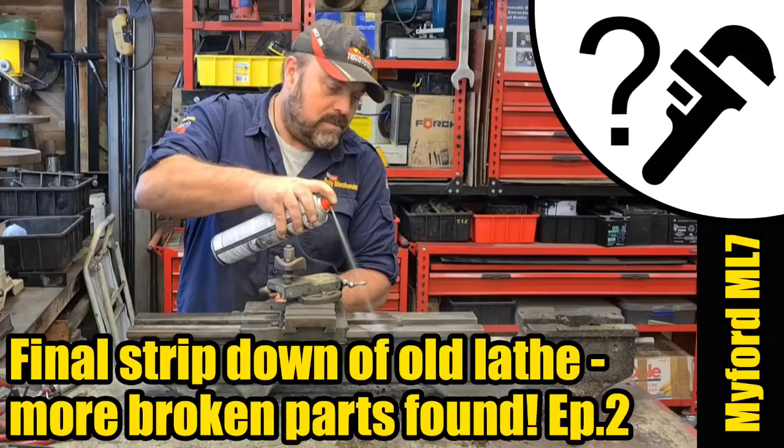Now, this particular lathe was made back in 1954 or 1955 by Myford. I'm not entirely sure of the day it came out of the factory. In the last video, we had a major problem.

That problem being, we weren't able to remove this end gear from the spindle. That's what Myford call this - this is the spindle from the headstock. If you look very closely, the two holes, or half holes, semicircular holes, should be aligned with a grub screw in there to retain this gear on the shaft.

I'm very confident that grub screw has fallen out at some point, and the gear has spun on the shaft, heated up, and welded itself to the shaft. But there's more to it than that - there's another reason why what I was doing in the last video was completely futile when trying to remove this gear the way I did it.

Let's take a quick look at the parts diagram and I'll try and highlight what the problem was - the oversight on my part. Here we go.

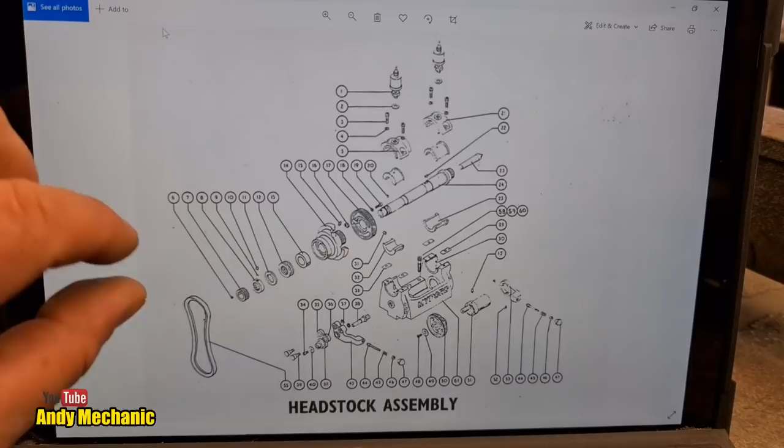So, as per the Myford service manual for this particular lathe, the ML7, this is the headstock assembly, and all the parts are numbered for reference so you can get the part numbers from the next page. The gear in question that we can't remove is this one here, and that little black dot, number 6, is the grub screw that's supposed to retain it on the shaft.

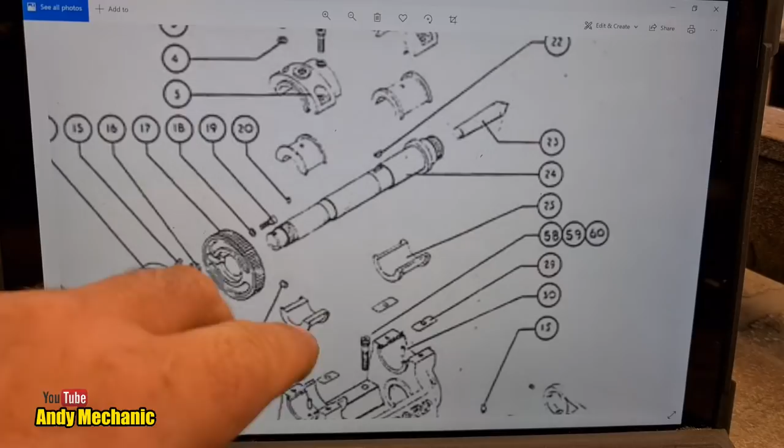If we follow that across on the exploded diagram, we can now see the spindle itself. If you look very closely, just there, I now know that to be a thread - very hard to tell from this diagram, but it is threaded. If you look at the other end of the shaft where the chuck goes on, it looks similar in the way it's greyed, but it's a very poor resolution image. I'm sure the actual printed manual will be a bit clearer.

That thread is for this collar. Number 8 is threaded onto the shaft, and it has its own little grub screw to hold it on. I was unaware that thread existed, and had the puller on the back of washer 11, trying to pull all three components off at once.

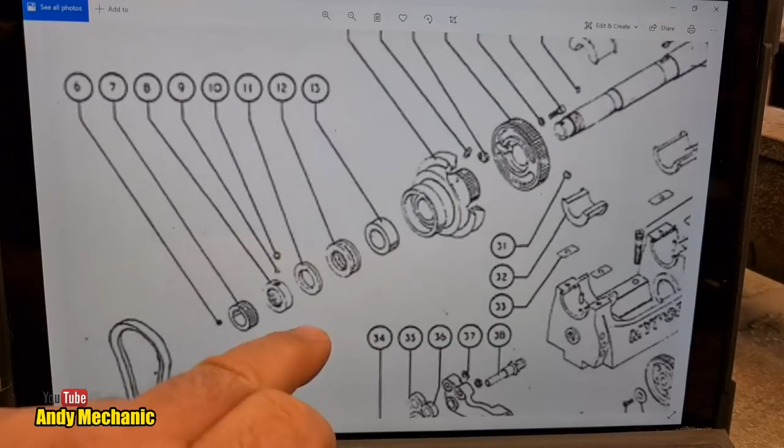The reason I did that is it was a lot easier to get onto that collar there - look, big washer with the puller, or even in the press - than it was to try and squeeze some kind of puller arms onto the back of the actual gear itself, which just, there was no space. You'll see that a bit later on. So we still have a problem.

So what are we going to do? How are we going to get that gear off? This collar here does rotate slightly - obviously it's free and now turning on the threads. If you look very carefully, you might see the gap between this collar and the washer underneath increase and decrease as I rotate that. It's very hard to see.

There is only a tiny gap between the collar itself and this gear. So we might be able to get in there with some big screwdrivers and give it a bit of a yank and see if that's going to cause this gear to come off.

The reason why the press in the previous video and the puller were completely futile is because I was trying to pull up on this, and of course the collar above it is threaded, so it was pulling against the threads basically - if I continued it could have let go and the whole lot gone flying around the workshop. Could have caused injury. So it just goes to show you need to do some research before you pull these things apart, and I made a mistake.

Hand up, Andy Mechanic did - another mistake, unfortunately. So we'll get this mounted in the vise and see if we can prise that gear off. We might even be able to use a little bit of heat.

Okely dokely. So like I said before, I was trying to lift it or pull it off from under here. We now know that was never ever going to work.

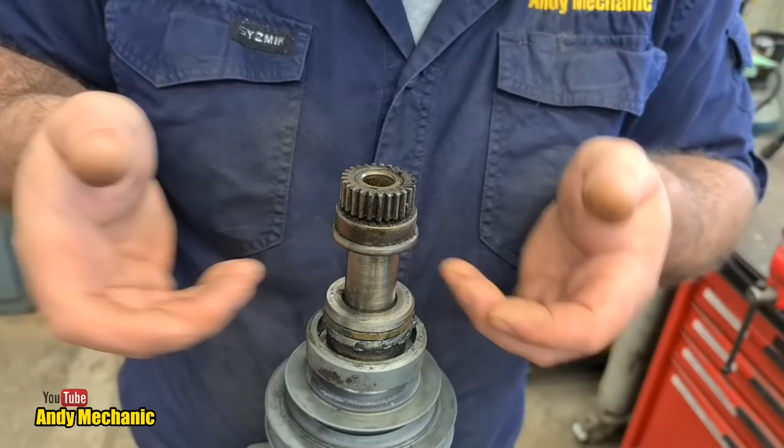Now you shouldn't use screwdrivers in this way, but the gap is so small, it's really only a screwdriver blade that I can get in there. So by using two opposite, I can sort of lever against this collar underneath, the threaded collar. I don't know if it's going to move or not, but we'll give it a go.

Look at that, it is coming off. Holy moly. I can probably get a puller underneath there now, because I'm running out of room with the screwdrivers, my leverage is disappearing. Oh, there we go, look, it's off. That actually wasn't too bad.

Excellent. See, with a little knowledge, things can be a lot easier, can't they? We'll get that out of the way, and now we should be able to take this off. I'll get some pliers and get some big vice grips on there or something.

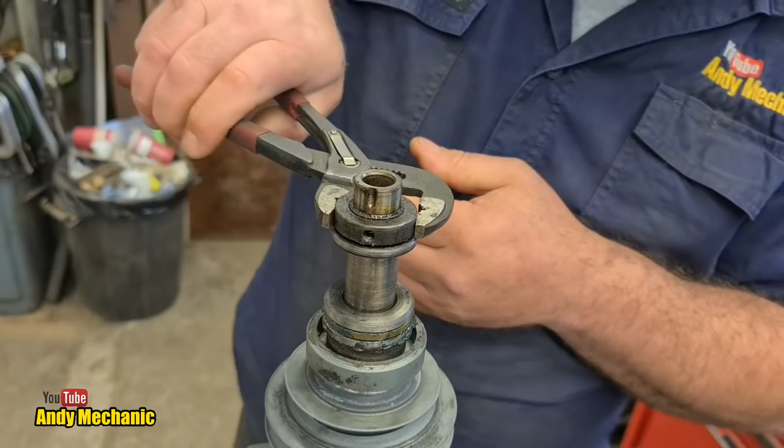Right, poly grips to the rescue. It's a little bit stiff on the threads, not surprising given the abuse I was giving it before. There we go, look. Wow.

And the gear itself, from the readings that I've done, this actually is a press fit gear onto the shaft. It doesn't just spin freely and held on just by that lonely grub screw. Well, that's fantastic, very happy that that's off now. You can see the threads that hold that collar in place.

Right, just lining everything up on the bench. Now we should be able to get that washer off. All goes to plan, there we go. And there's a little tiny pin.

I'll just rotate it in the vise for you. Jeez! There's a little tiny pin that also locates that washer into place, and that's just there, look. So we'll see if we can try and get that out next. It might be harder than we think. We'll see.

We've got some movement. I think it's coming. Yes, definitely coming out. Oh, there we go. Right, don't lose that.

So now we should be able to remove this thrust bearing, so we can get that bit off. And that's one of the outer races and the bearing itself. Pop that down on the bench. And we've still got this inner race to do.

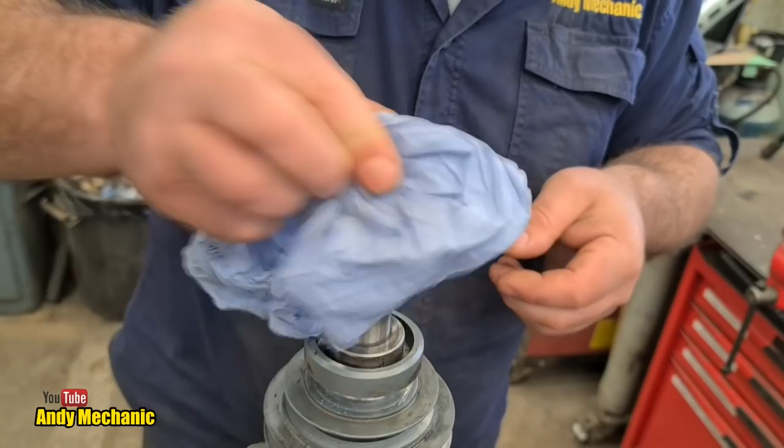Right, what's next? Okay, looking in the parts diagram, it appears that we've got the aluminium pulley set, and we've got what looks like a steel collar, another one. But this time there appears to be no grub screw, so all I can assume is that's a press fit onto the shaft. And yes, this is all part of the pulley by the looks of it.

And that is the steel collar. Now, I'm pretty reluctant to put a puller under here, but I can't see any other way of getting this collar off. So we're going to have to pull the pulleys with a puller off the spindle, and hopefully it'll bring that with it. Let's make sure we get right under there, aren't we?

Otherwise this aluminium could break off and then we've destroyed the pulleys. And they don't look to be in too bad a condition at the moment, although I've not done a full inspection yet. Jeez. Now, the pulleys themselves also have a couple of grub screws in them.

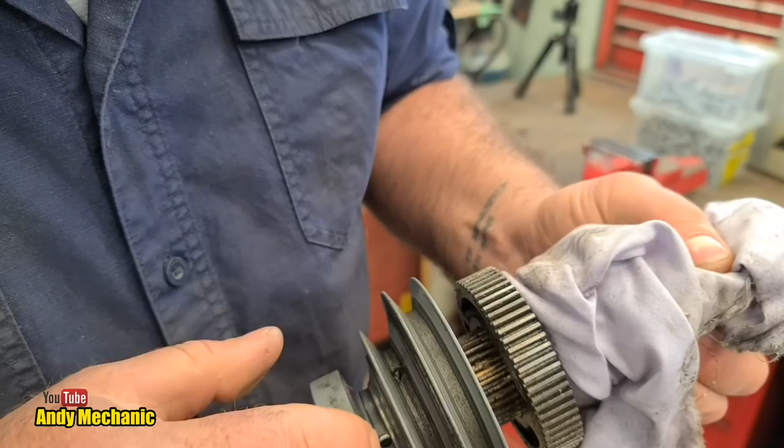So I need to remove those first. You can see down there, look, one's already missing and there's one in there. So we'll get that one pulled out. Like I said before, one of the grub screws is already missing from this pulley set, but we can get this one taken out now. Right, where's my little pliers? There we go, right, let's not lose that.

Now, I've been able to think about how to do this. I'm really reluctant to put a puller on the back here to get this collar off. I'd rather try and get something on this shoulder here and push the whole lot off in one go. I think we've got far more chance of not breaking something by doing that.

If I distort this piece, we've got a serious problem. And don't forget, it appears that there's a belt. This is actually a pulley itself here, and this surface here is a belt driving surface. So if we cause any harm to that and put marks in it, it's going to start to eat belts. So I think it's a complete no-no to put a puller on there.

We only have one option. Now, to do that, we need to make sure there's no more grub screws on any of these components. By the looks of it, there's one more here, so we'll pop that out if we can. So far they've all been pretty loose. Now these are Imperial. Oh, there we go, that was easy enough.

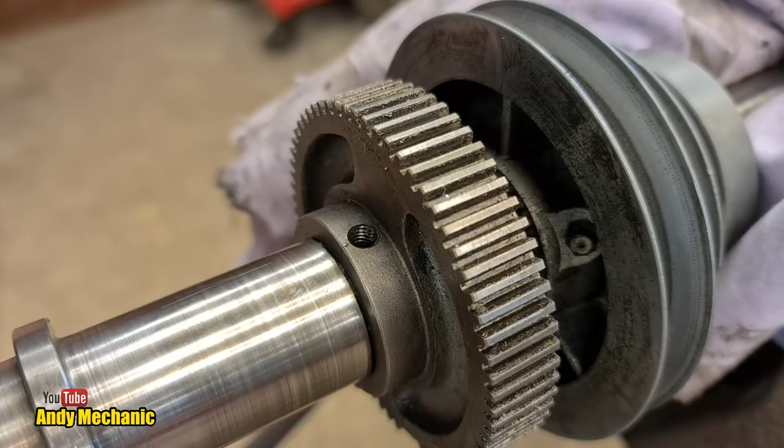This gear is the reason why we're stripping this whole thing down, mainly because it's got some missing teeth. Where's my pliers? There we go. I think they call this the bull gear, from memory. Okay, so that's out. That gear's still tight on the shaft.

Are there any more? Let's have a quick spin round. Jeez. Okay, I'm going to undo that because there's a little locking piece at the back, and again, I don't want to put any stress on that while I'm pressing the whole thing off.

So, is that the same size? It's not. It's the next size up, which is 5/32. Sorry, I'm a metric kind of a guy.

There we go, look. Make sure you're all the way in. Here we are. Excellent.

Right, so now the little piece at the back should come out. It's like a little locking piece. There we go. Hey, come back. Excellent. Right, that is now out, and we can remove that.

So we'll just screw that back in there so we know that's where it comes from. Cool it up, stick that on the rag. Okay, so by the looks of it, all of this now is free on the shaft. We've got the pulleys spinning freely, and that inner gear down there appears to go with the pulleys for now. So we'll get it back in the press and go against this shoulder here.

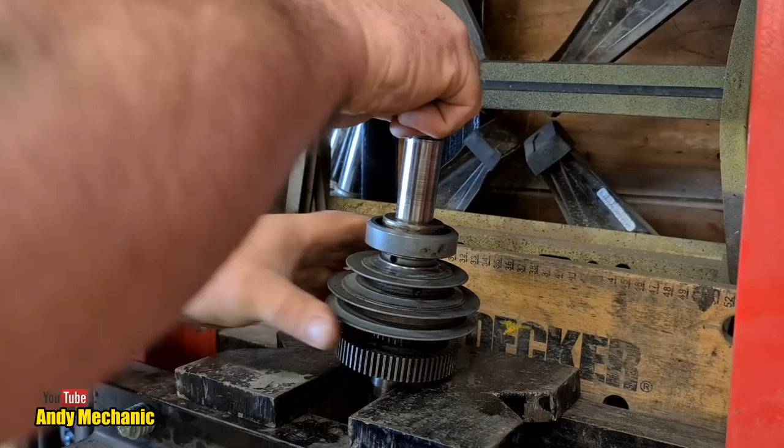And see if we can get the whole lot pressed off in one go. Fingers crossed. Jeez, is it going to work? I don't know. Should do. I can't see any reason why not.

There we go. Here we go. There's some damage on those threads. Jeez. Oh, look at that. Right, we've got instant movement. It's not too bad. Everything seems to be moving really well.

Just going to ease that through and catch the spindle as it ejects out the bottom of the press. That actually was remarkably easy. I was expecting a bit more of a fight, to be honest. Oh, there we go. Perfect. Super job. Right, back to the bench.

Right, actually with a little bit of research, we're able to get that spindle stripped down really easily. It could have all gone really badly wrong if I'd just tried to continue the way that I was in the first episode.

However, the spindle itself needs to be replaced. It's got quite bad scoring where the two bearings run. That's this area here, just behind the chuck, and of course this area here. If you run your thumbnail across there, you can feel ridges in the shaft on both sections.

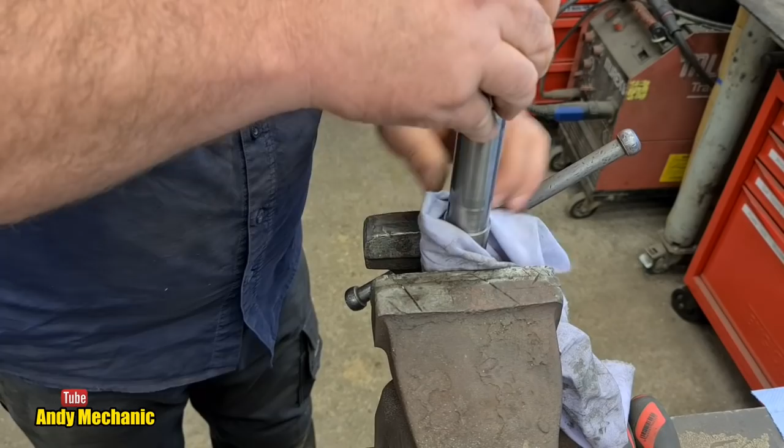So, how are we going to do this? We'll pop that in the vise from that end, using a rag. Again, they are aluminium jaws in this vise, so it's just an extra precaution. In fact, it's going to have to go upwards, isn't it? It is. So we'll stick that down there like that. Right, if we get the pulley set, and it runs in this area here on the shaft, just behind where that woodruff key is.

Drop it down there, onto the shaft. And I'm just going to hold it in about the right position and just feel for any kind of... I'm trying to rock the pulley side to side to feel any kind of play on that bush. And there is the smallest amount, a tiny amount, really just enough for oil clearance, really. So I think that's in pretty good nick.

And the bush itself does not look badly scored. It looks pretty smooth on the inside. So I think we've dodged a bullet with that, and we're all good. We can reuse these. So with the spindle now fully stripped and all the parts sort of inspected, the bits that I needed to inspect at least, the other bits are going to get replaced anyway.

What's next? Well, we should really strip down the gear train that sits at the back of the lathe, at the end of the lathe, behind the headstock. It's filthy. The lathe has been sat exposed in the workshop for a fair few months, and there's lots of grinding dust and dirt and all sorts that's got into those gears, and they all need removing, cleaning, and then inspecting. So you can join me and we'll get them all taken off, hopefully.

It sounds like we've got our wannabe lumberjack running his chainsaw again.

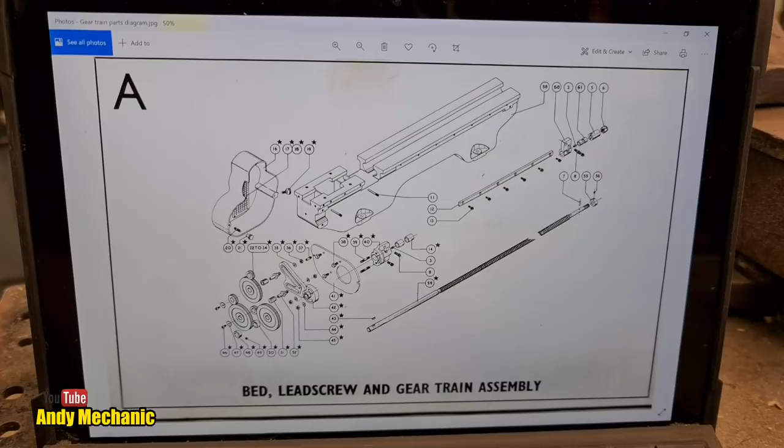Excellent. Okay, so this is the bed, lead screw and gear train assembly parts diagram. How was that for a mouthful? So just looking for a few clues before we start to delve onto the lathe itself. Doesn't look too difficult a job. We've got some end screws here with washers basically holding each of the gears onto their respective shafts. And the idea is, oh, go away. The idea is to get all of this removed together with the bracket that sits at the back. Yeah, shouldn't be too hard, should it?

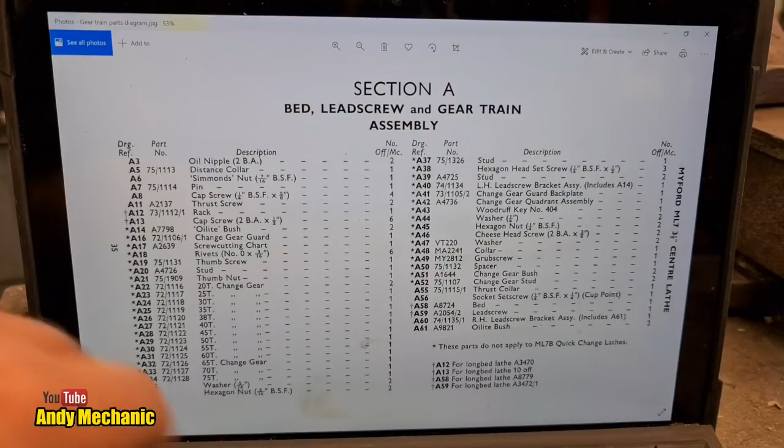We've got all the various part numbers, just for your reference, all the part numbers relating to the numbers on the diagram, just there, look. So we go back to the full diagram, you can see everything there. Right, to the lathe. As you can see, it's very, very dirty. There's swarf and bits of wire brush and all sorts embedded in this. Now,

I reckon this one first, don't you? Let's give that a go. See, I wonder how tight it is. Oh, there we go. Not bad. Not bad at all. And I've got a good parts bin ready to accept everything that comes off. So we've got a screw and washer, and then we should be able to get that gear off there, look. There we go. Any teeth missing? Oh, it looks okay for now.

I'm hoping I don't find any more damaged parts, because that would mean more delays in getting the bits from the UK. That looks okay on initial inspection. So I'll pop it over there with all the grease. Now we can do this one now. Let's get this one undone.

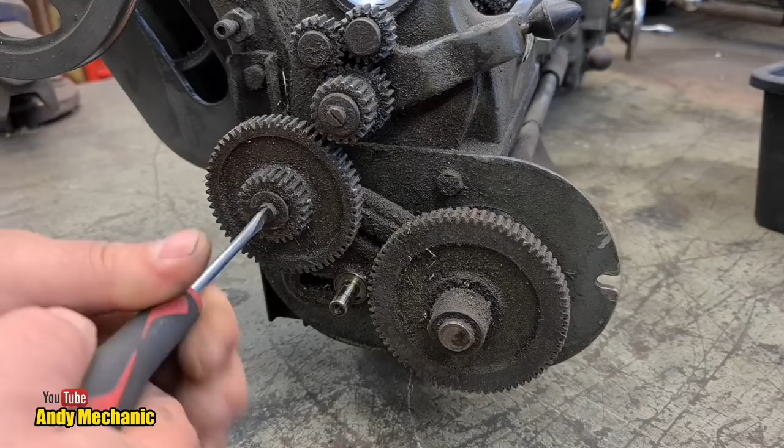Jeez, he's cutting some logs today.

Right, there we go. And these are not over tight, to be fair. And by the looks of it, there's no thread lock on them. It's just oil or grease on the threads. That's something else to note during the assembly. Both of those two screws look to be the same, but the parts diagram will confirm that for us.

Right, so now we can get that one off. And again, any missing teeth. This is the critical thing. If we've got broken teeth, we have a major problem. Nope, that all looks okay. Look at the dirt on there. It's horrendous, isn't it? Right, we'll stick that over there.

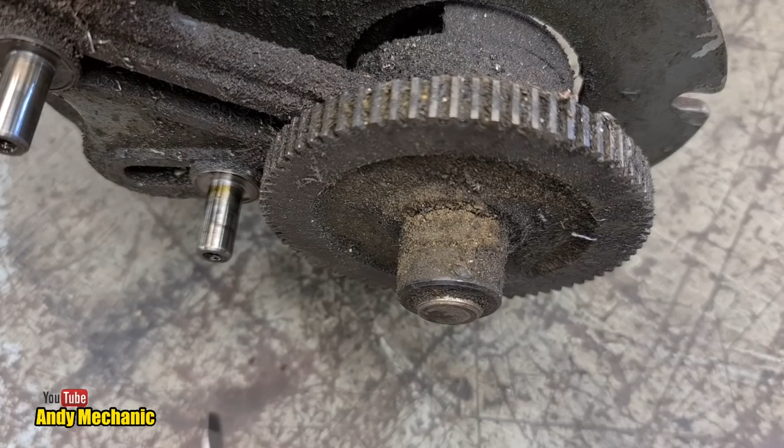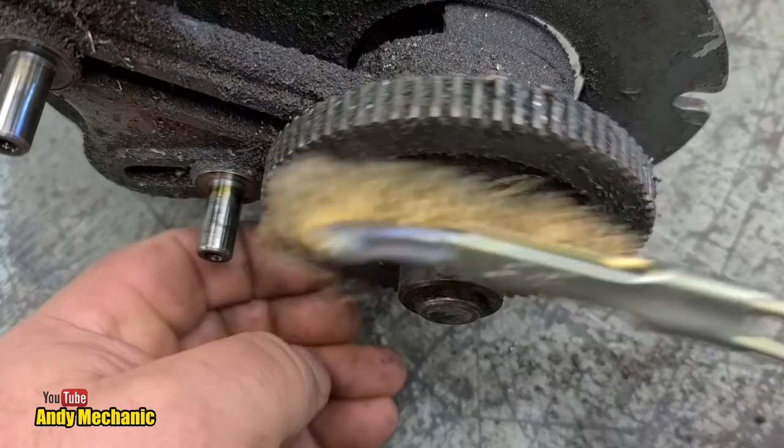Now we've got this one to get off, and this appears to be held on slightly differently. I wonder if there's a little grub screw hiding under there. Time for a wire brush. Bit of a clean. Right, let's just get the thick off first, and then we'll give it a bit of a spray with some brake cleaner. Yes, there's a collar, by the looks of it, with a grub screw in it. There we go.

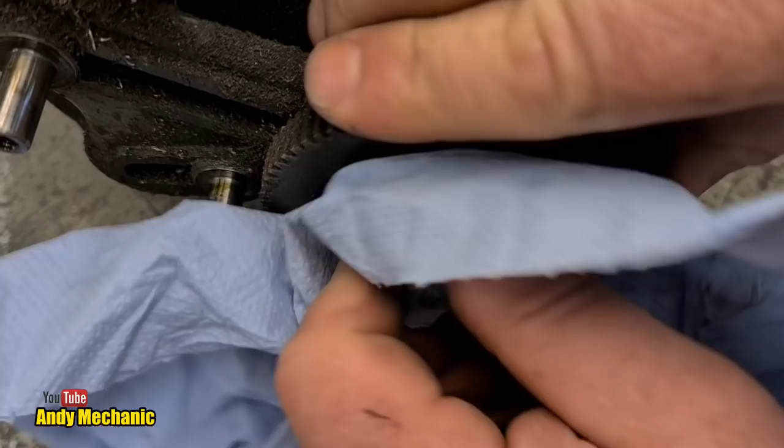Jeez, don't get on the lens, Andy, like last time. God, that would be terrible. In fact, it was carburetor cleaner last time, and I really thought I was going to destroy the lens on the camera. Or at least the surface of the lens, anyway. Okay.

Right, here goes. Looks a little bit chewed up. Fingers crossed.

Oh, yes, look at that. Bloody good. Right. I'm not going to take the grub screw all the way. Am I? Yes, I will. I'll put it back in again a bit later on, just so we don't lose it. There's a lot of grub screws on this lathe.

So, how are we going to get that off? Is it loose? It's not loose. Maybe a little tap. Is that one piece, or is that a spacer behind it? I don't know. I wonder if I can wiggle it off with a flat screwdriver. Oh, look at that. That was lucky.

Go on, mate, you can chop that log.

Is that one going to move? Yes. Okay, can we lever them both off the gear? Almost. Two screwdrivers required. Bear with me. It doesn't really warrant getting a puller out, to be honest. It's only just beyond being able to pull off with your fingers, so maybe we can just do that. Oh, there we go, look. It really isn't putting a lot of force on the gear itself. Right.

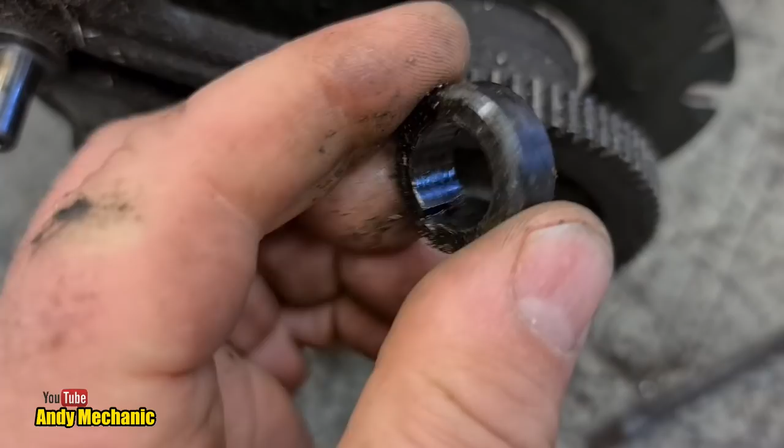Cool. And, little hint, there's going to be a woodruff key in there as well, look. So pop that in there. Twizzle that round, and hey presto, there's the woodruff key. So let's get the gear off first, if we can. He says. Oh, there we are. It's just a good fit. It's going slowly.

There we go. Right. And of course, it's in a filthy condition with the rest of it. But any missing teeth? Doesn't look like it, does it? I think we're going to be okay with that one. Yep, that looks all right to me.

Now, Mr. Woodruff key, is he going to pop out? Or is he not going to pop out? Sometimes they're a bit loose, sometimes they're really tight. This one looks a bit more tight. Maybe we can just ease him off there, look. Oh, there is movement. No, my word, that bearing's a bit shot, look. Look at that. Oh no. There he is. Right, woodruff key is out. Excellent. We'll stick that in the middle of the gear.

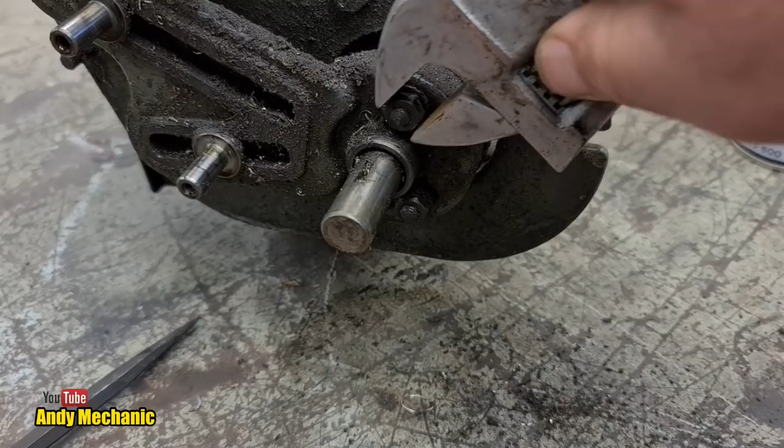I've got a choice. I could use a single hex socket, but you won't be able to see a lot of what's going on. Or I can use my Imperial monkey wrench. I don't know if this is going to work or not, but anyway. I do have some Imperial spanners, but they're in an old ammo box that came from England, which is buried in the other shed at the moment. So, I can't get it out. Let's give it a go. Oh, it was pretty loose actually. That was lucky. I'll have to get a set of spanners when I come to put this thing back together actually.

Right, can we get that one off? Yes. Actually, quite loose in fact. There we go. That was fortunate. And it seems that a lot of stuff on this lathe is actually quite loose. Right. Come on, Mr. Washer. There we go, that's one. Put him over by the parts tray.

Oh, that's a bit tight on the threads. Jeez, can we get in there? There we go. And the washer. I should have worn gloves. I know I should have worn gloves, but I'm trying to save my gloves because there's not many in the world at the moment. Right, that is now undone, and I think that should now come off there with a bit of persuasion.

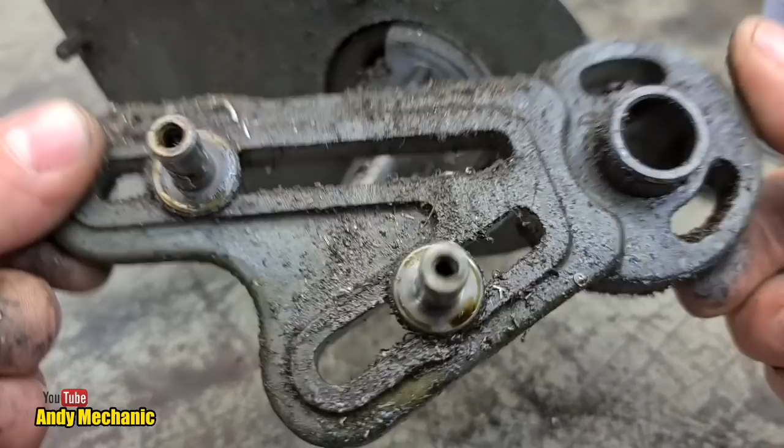He says, where's my big screwdriver? Everything's a screwdriver, isn't it, on these things? Oh, we're getting some movement. There we go. Super job. Look at the state of that. That is a bloody good clean, isn't it?

Well, whilst we're on with it, next job, this backing plate. And I've got a 12mm single hex socket on here. So, oh God, it's loose. Oh no. Right, that's one. I didn't want to use an impact wrench because there is some movement between the socket and the bolts. I can just ease them off with this rather than destroy the bolt head. I'm trying to keep everything as original as possible.

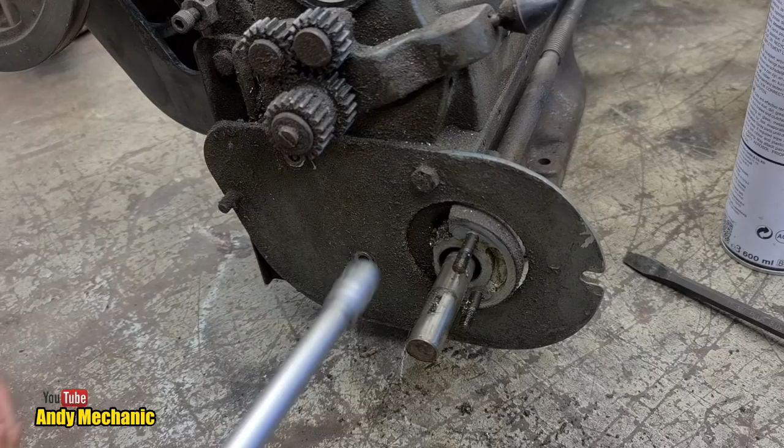Surprising how loose everything is there. There we go. Right. Oh my God, look at the state of that. You could measure that in inches, the amount of grime on there.

Next job is these sort of intermediate gears, and this I believe is for forward and reverse. I'm not too sure. I've never used one of these little Myford lathes. I think when you move this down, then there we go. Look, it then, I don't know, potentially puts another gear into mesh or something. I think from memory, from what I've read. We'll soon find out when we get this thing fired up though, won't we?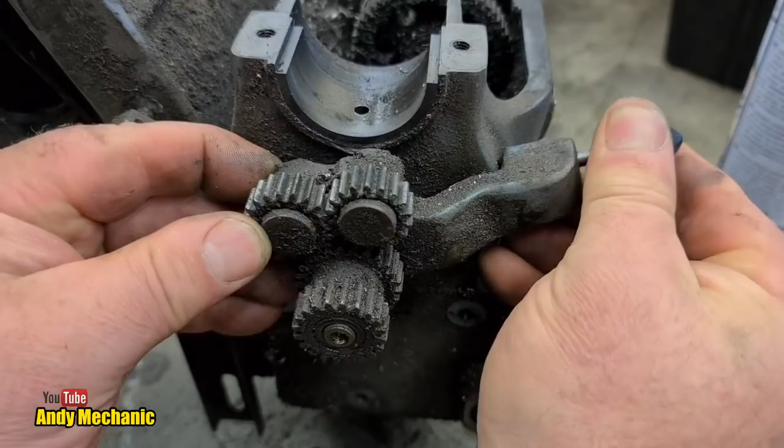Right, another screw. Another loose screw. There we go. Okay, now, will that all come off there? I think it might if you pull that plunger out. It's going to need some persuasion. Where's my big screwdriver? Is that going to help? I don't know. There might be a grub screw in there. Let's go and check the parts diagram.

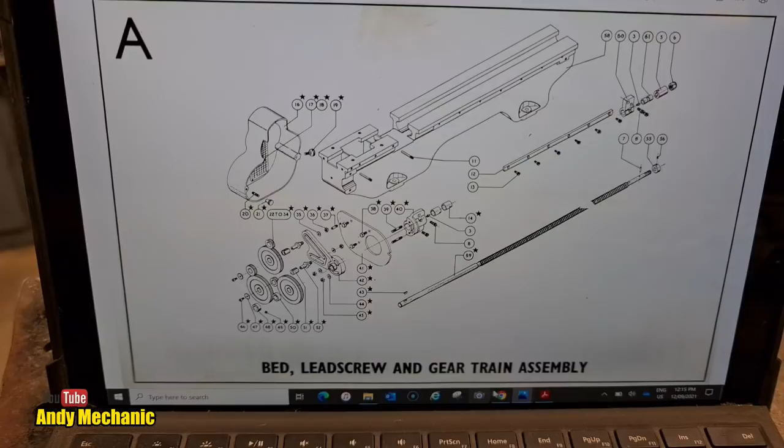Right, let's have another look. Ah, it's not on this diagram, so we're going to need to download a different one from the Myford website. So let's go on to there. I've already got it up on Google. There we go. So if we go back one, here. So where will that be? We've done headstock assembly. We've done bed, lead screw and gear train assembly. What section will those gears be in, do you think? Quick change gearbox, we haven't got one of those. Motorizing assembly, maybe in there, I'll have a look.

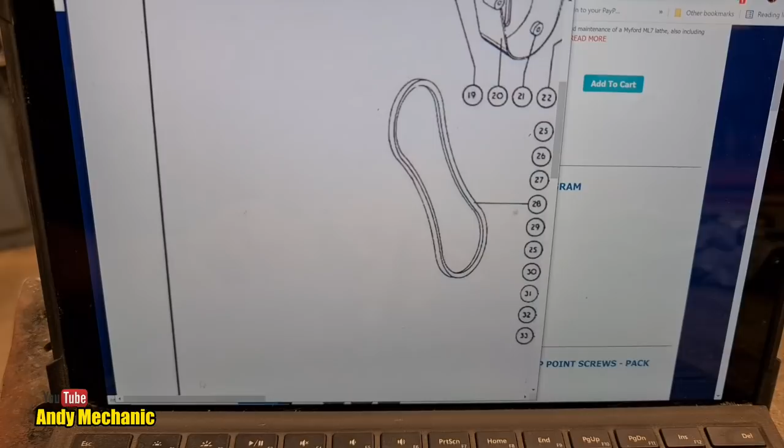Right, view parts diagram. Let's see if it's in that. Hang on, it's going to require more fingers because I've not downloaded it yet. Is it in there? It's not. That's just the motor itself by the looks of it, I think. Oh, there's some more at the bottom. That's just the parts list. So no, it's not in that one. So we'll close that. We'll go back.

What could it be in? History of the ML7. Interesting. We should do that one day. Carriage. No. Headstock. Maybe it's back in the headstock again. Let's have a look. I don't think it is, but we'll have a look. I'm pretty sure this was only... Oh no, there it is, look. Okay. Right, so zooming in. It's a pretty pants picture, isn't it?

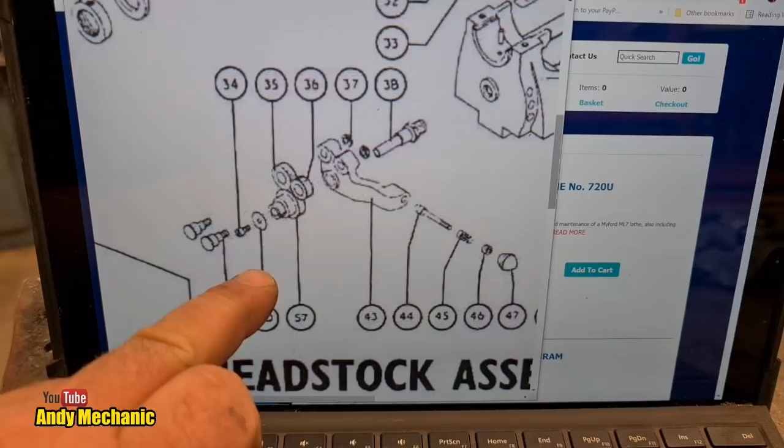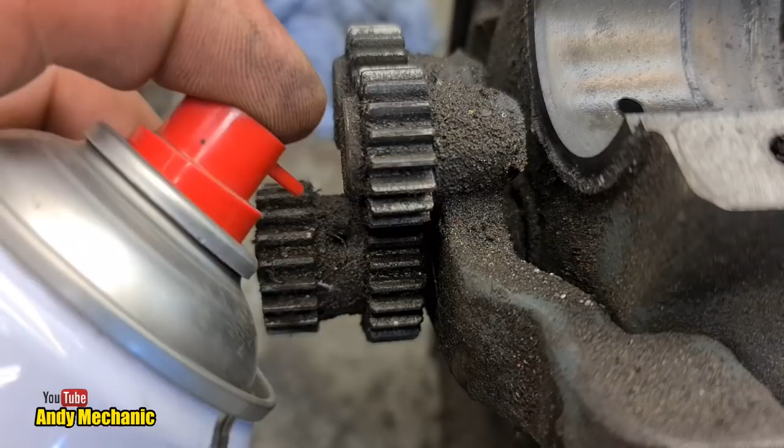We've taken the screw out. And is there a grub screw on there? There isn't. Let's take a closer look on the actual lathe itself. So we'll just chuck a bit of brake cleaner on there. Just a little bit. Where's my wire brush?

Is there anything down that hole? Doesn't feel like there's any threads. Seems pretty empty. Maybe it'll just come off. Ah, right. Okay, that was easy. Pop that in the parts bin with his little screw. So why is this not coming off the lathe? Well, maybe it needs some persuasion, I think. Let's just get a screwdriver behind there and see if that's going to help to ease it off.

It feels pretty solid. Doesn't want to budge at all. It does pivot quite easily. Maybe we can just wiggle it off, I don't know. The whole lathe is moving. How is that held on? Bugger.

Right, let's put this all the way down so that the notch pin, the spring-loaded notch pin device, the detent locator, is on the casting and not in one of the holes. And then let's try our two screwdriver technique again. I'm not overconfident with this, to be honest. But it should just come off.

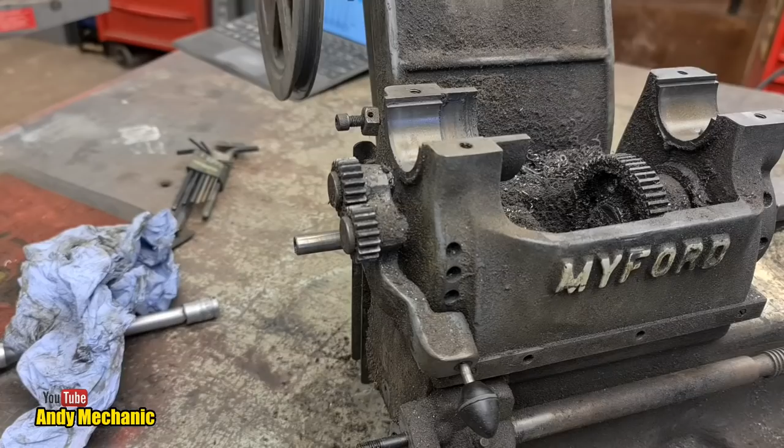Well, I've been battling away for a while and I can't get it to budge under normal manual leverage using screwdrivers and bits and pieces. So I'm just going to try a little tiny puller to see if I can get it to move. I've checked that the taper on here isn't going to cause any harm to the threads in the shaft, so wish me luck. A bit fiddly, could do with a tool girl here to give me a hand, to be honest, but I reckon we should be able to get that behind there somehow.

Okay, that's 2, 3. Okay, holding it all together. Oh, there you go, look. That was ridiculously easy. I feel quite embarrassed now that I couldn't get it to move by hand. Okay, is it going to wiggle off now? So close. There we go.

Excellent, right, that's now off and ready for cleanup and disassembly and re-oiling. Lovely, and all the teeth look to be intact. There doesn't seem to be too much play on the bushes either, or bearings, whatever they are in there.

Probably bushes. Cool. Now there's still a gear hiding in there that needs to come off. God, it looks a mess in there. Just look at the state of that. It's in a terrible condition. It's actually rubbing against something as well, actually.

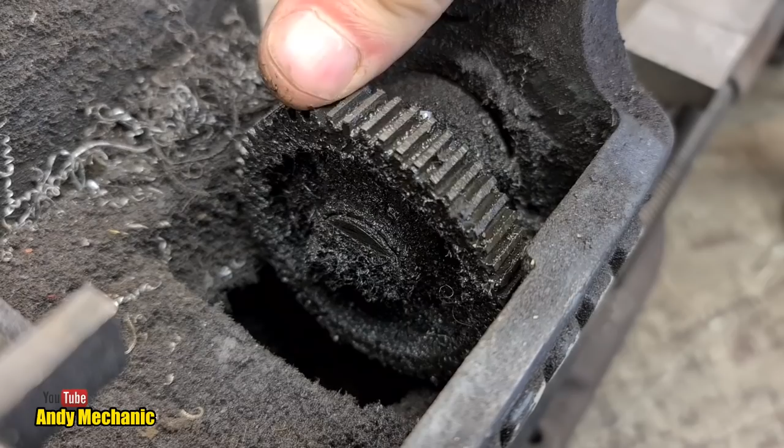Oh no, a broken tooth. I hadn't spotted that. I'm going to have to order some more parts. Oh, bugger.

Why is it catching though? That's not right, surely. Okay, I think it's time for some more spray. It's horrific.

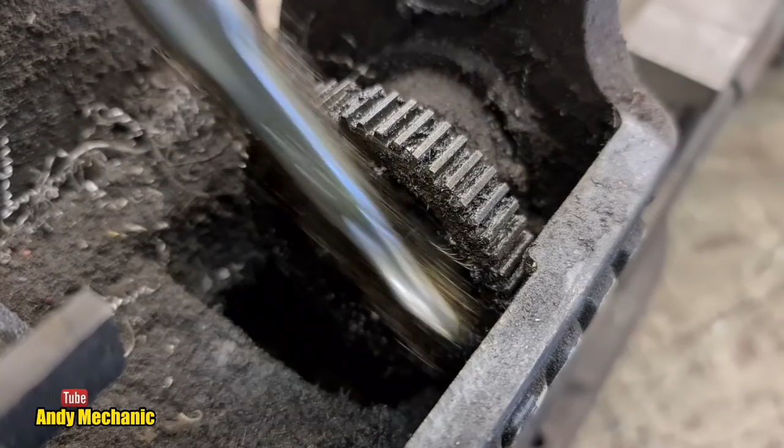How the hell's that held on? Is it a circlip? Have they actually used a circlip on this lathe? Jeez, sorry camera. Oh no, I can't believe I need another gear.

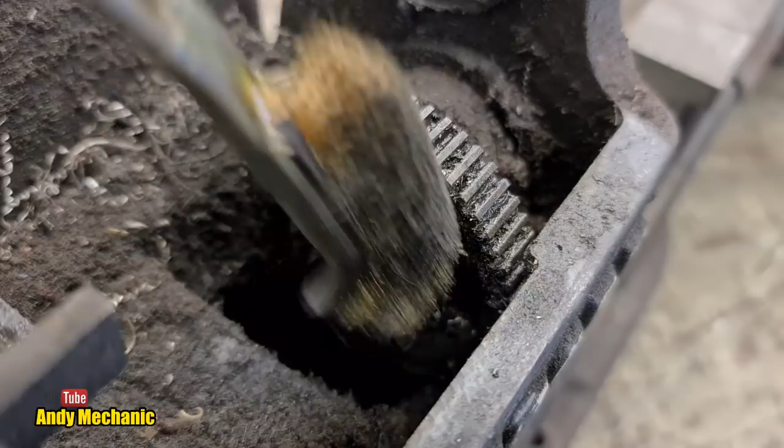So we'll get the little scraper in there, we'll just clean out all the crud. I think it's an Allen key anyway. Yes, it is, definitely, definitely an Allen key. Is it this size?

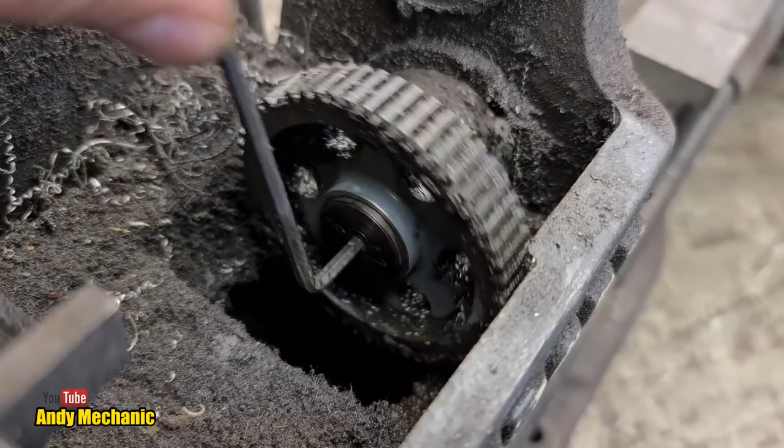It definitely is. Ah, okay, so it obviously went too far and was rubbing against the casing. So if we just pop the odd screwdriver down there and fill in the gap, maybe - oh, there we go, look. Perfect.

Now I've got to try and get it all the way out. I definitely don't have a socket the right size. It's got a ball on the end, it has. Right, so let's give that a go then, see if we can ball it out.

Yes, excellent, good little Allen key, well done. Now let's try not to drop the screw. Is this magnetised? No, it's not. Is that one magnetised? Yes. Right, so we'll use that one then to catch it, hopefully. God, it's like brain surgery, is this?

Alright, she's coming, the washer's loose. Well done if you're still watching.

Oh, it might be too heavy for it actually. I don't know, maybe Mr. Pliers can get in there. Where's my pliers gone? Okay, we're going in, extraction team.

Yes, that's a win. Okay, let's just get rid of our screwdriver that we used as a lock. And now that should, yes, that'll twizzle off the end. Brilliant.

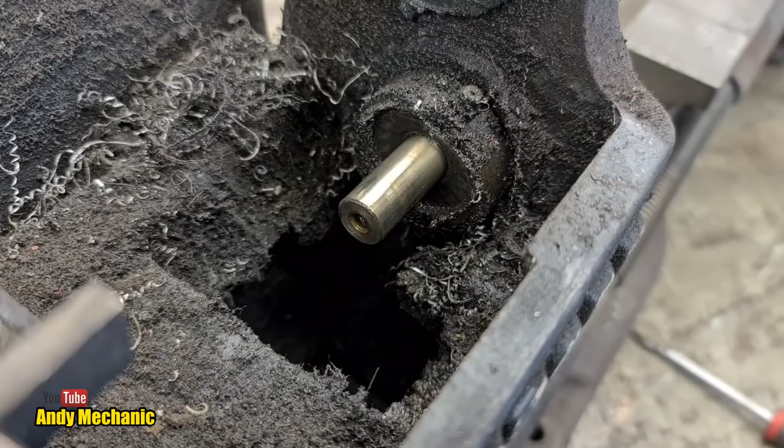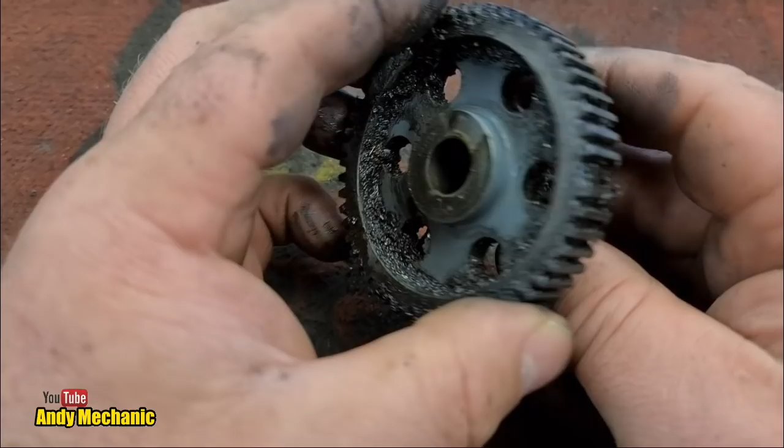So there you go, that is the broken gear. I'm trying to get it to focus for you. There we go, look. So that must have got broken, I think, at the same time or as a result of mechanically locking the drivetrain to remove the chuck. Bad idea, people, you shouldn't do it. There are other ways. So it looks like it's all one piece, two gears machined or cast from one piece. So I'm going to have to order another one of these. James, Myford, I need another gear.

Bugger, there's still another bit to remove, and Myford call it a back gear eccentric assembly. I'm not sure. Oh, yep, there we go, look, it just pushes straight out. It must just - well, what the hell holds that in? Seriously, it just floats around? Okay, well, we'll pull that out and see if there's any markings on it.

Oh, it's got a good oil supply. There we go, look, it's out. Looks like a lubrication hole. So you put the oil in there and it comes out there and there.

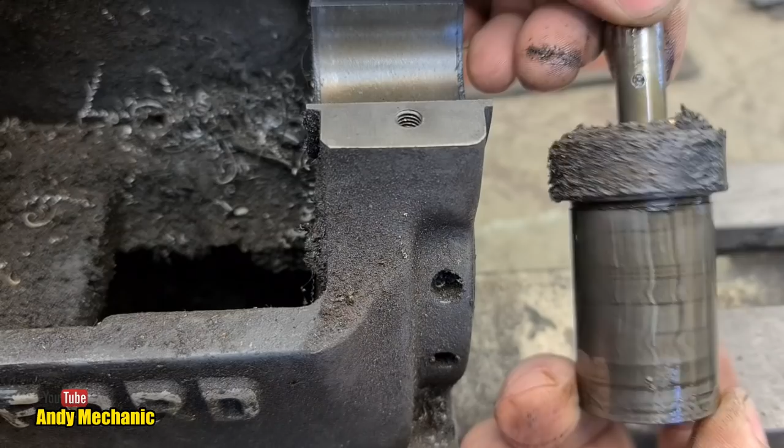Geez, that's full of crap. Oh no, look at that. That's terrible. There's dirt in the oil ways, so I'm going to have to make sure I clean all these out really well.

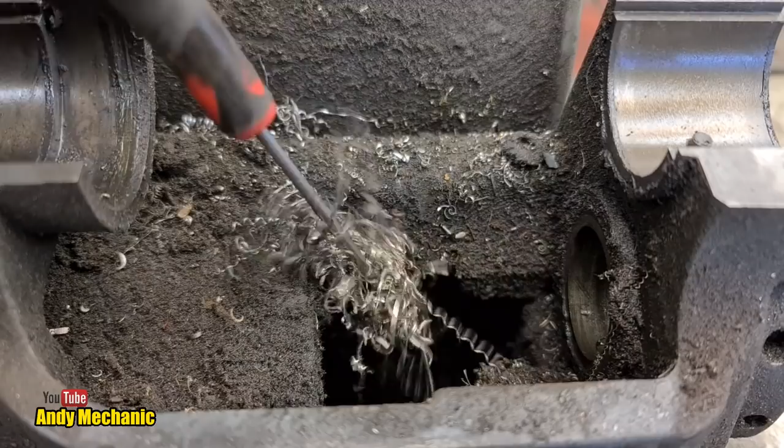Damn, okay, in the box. Holy moly, look at the state of this. It's just horrendous, just built up grime over the years. Mind you, saying that, I bet my boxer's not far off as bad as this in certain places.

Lots and lots of cleaning up to do. Jeez, things are really coming apart with this Myford lathe now.

Next step, I think we should disassemble the carrier for the motor assembly, and that sort of top shaft. I'm not too concerned about taking the shaft out at the moment, I just want to take that whole lump off the actual main lathe bed. And I think I've already removed the motor mount from the bottom. That's already over there, it was done ages ago because I couldn't lift it with the motor in place.

But we've got that top pulley and like an idler shaft up at the top. Let's see if we can get some of that taken away because it all needs to be cleaned and I need to make the lathe sort of manhandleable.

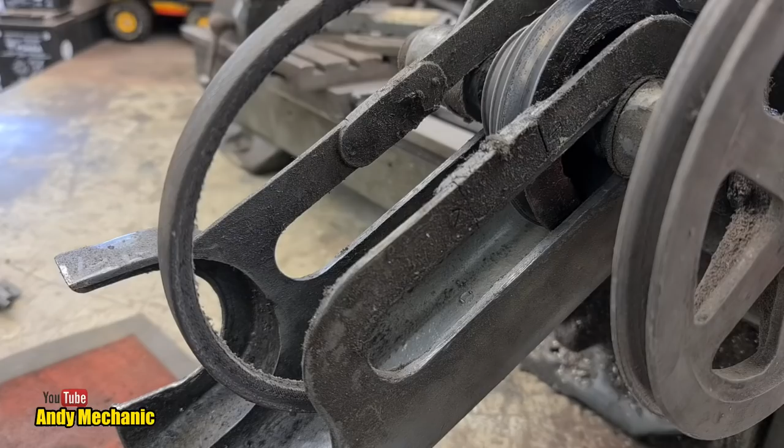Right, here we go. Now, one thing I'd like to get out of the way really early on is this top cover that covers the small belt, the drive belt. And by the looks of it, it's got these little sections that you can remove, and then we can unhook it or get it off the actual spindle because at the moment you can't.

So let's get in there. I don't know how tight it... Oh, God, tight is not the word. Okay, that's one, I have to go around this side, I think. That's ridiculous, that was about to fall off, Dave.

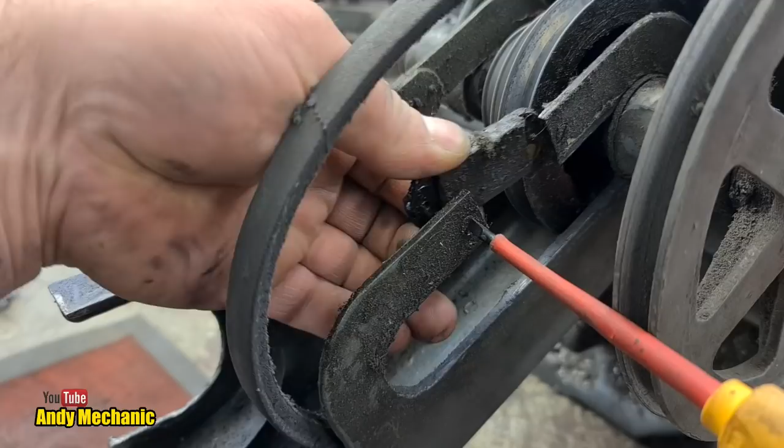Dave's the previous owner of the lathe, by the way. Great chap, a lot of respect for Dave. He's a proper engineer, is Dave. Maybe not so good at maintaining stuff, but he's a proper engineer. He makes a lot of stuff.

He's very clever. Right, that's one off with said screws. Oh, man, I'll just clean my hands as well. Okay, let's see if we get the last one off.

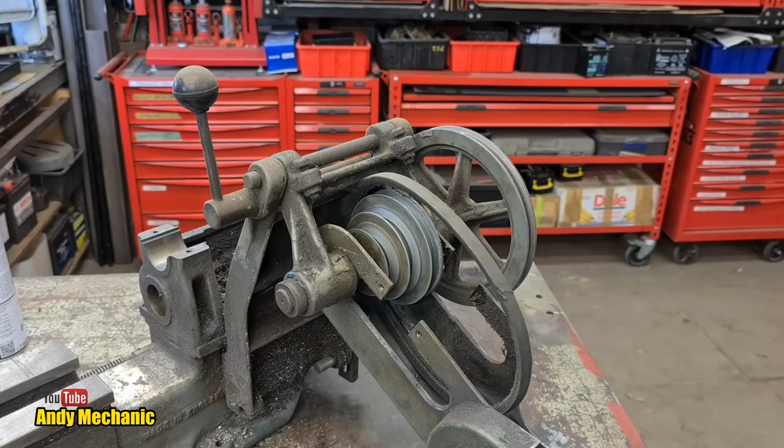That's one screw. Right, last one. There we go, pulley out. Right, so pop those in the parts box. If all goes to plan, we should be able to remove this now. Oh, look at that, awesome design. Good job, Myford. Okay, so what's next?

Well, there is this shaft. It's all looking pretty manky in there. Oh no, the pulleys are loose on the shaft as well.

What's going on there? Now, I did watch a chap on YouTube who tried to remove this top pulley from the shaft, and unfortunately it was on so tight it got damaged. So I'm very, very worried about causing problems and damaging this one. But I'm probably going to have to give it a go, unless I can withdraw the shaft that way and leave this large pulley on the shaft.

That would be ideal. So we've got two more grub screws hiding in that smallest aluminium pulley. Need to undo those. Working around the tripod now. Right, let's see if we can get these two grub screws cracked off.

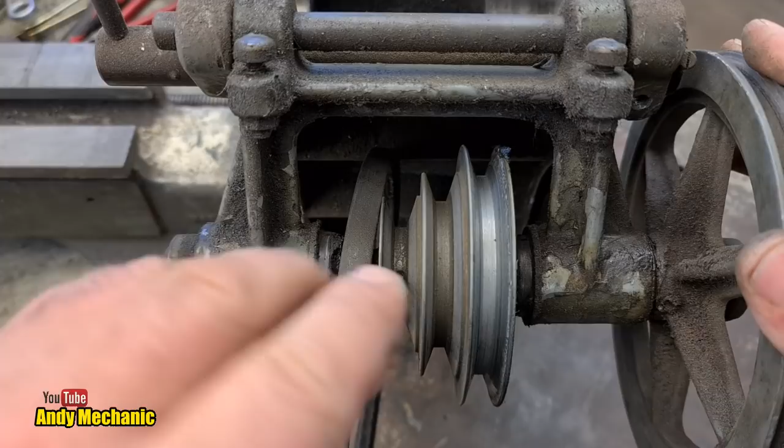Jeez. Wow, that's pretty damn tight, to be honest. Sorry, tripod. It is coming out there, slowly. Wow.

Okay, talk amongst yourselves for a second. I do like these old lathes though, they're very cool. I was brought up with the old Boxford at school. That's what I learnt on, pretty much.

So, right, that's one grub screw out. Let's not lose that one. Is this one going to play ball? It is. Oh, sorry, tripod. Equally as tight. I think somebody must have used thread lock on these, which is probably not a bad idea.

Wow, that's taking my thumb pressure to an absolute limit there. Not much leverage.

Okay, second grub screw is out, which means that pulley is now relatively free on the shaft. There must be a woodruff key or something in there as well. Now I notice a collar at the end here, and again that collar has got a grub screw. I've not actually looked at the parts diagram, but it doesn't look overcomplicated, so we're going to try and wing it. Oh, there we go, look, that's not too bad.

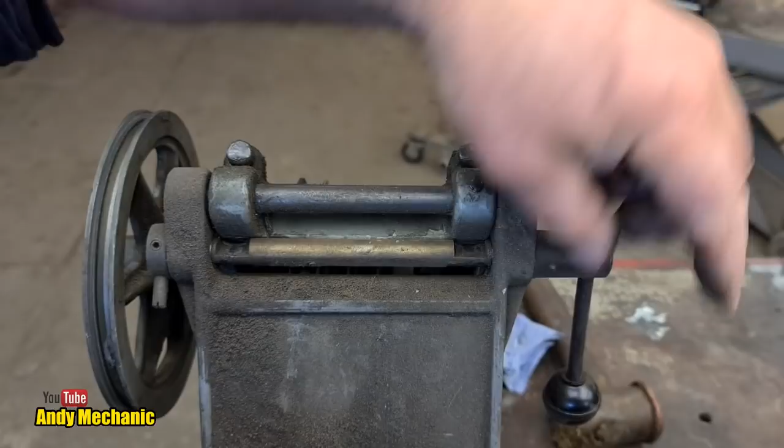Right, more grub screws, jeez. Honestly, Myford must have shares in grub screw making factories, because - oh, it's loose. There are so many grub screws on this machine, it's unreal. Right, let's take that one out. There we go, don't lose it, Andy. Looks like another one of the same kind of grub screw. Now, that does appear to be the only one.

So the question is, can we now tap this shaft out without causing any damage? I think we can. Now I'm assuming it goes that way - I can't see any change in diameter, so maybe.

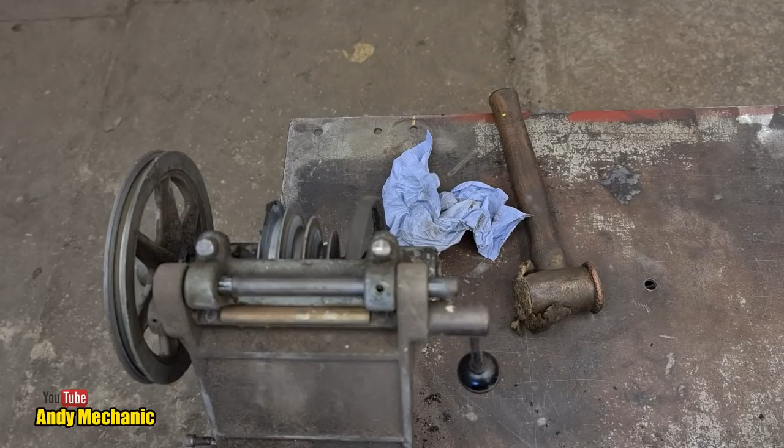You guys are getting the shakes, aren't you? Apologies, I can fix that. Bear with me. You're now mounted from the light - how cool is that? Right, you shouldn't have any kind of vibrations now going on.

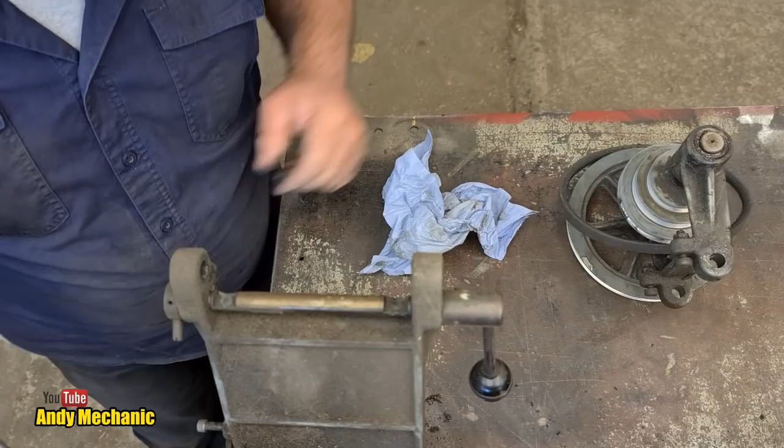Excellent, right, it's off! Bloody good, I can really feel the end is almost in sight. Just that large bracket that bolts the back of the main lathe bed to remove, and then a few more checks. I think we're done, because there's going to be a separate video stripping down the carriage and maybe taking a look at the tailstock as well.

Right, back to the grime. Look at the state of my hands, and I've washed them three times already. While it's still in place, let's get this adjuster rod thing out of the way - and that's for the belt tension, from memory.

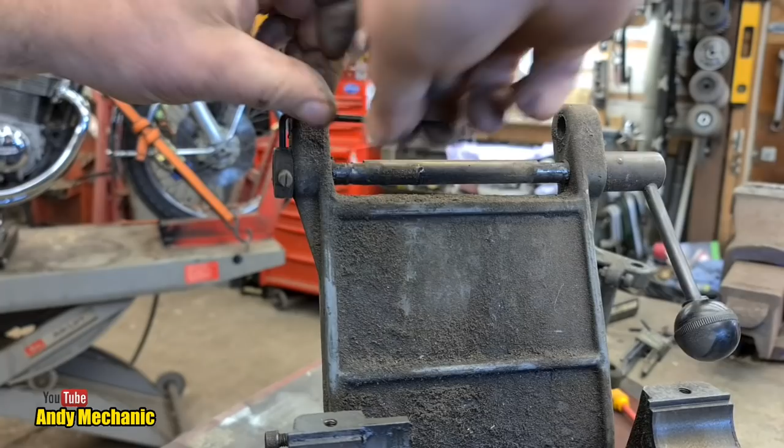Right, yet again, another grub screw and another collar. Not sure what this bit's for though. Right, grub screw is out. Don't lose that, Andy.

Maybe we should unscrew that. Where's the screwdriver gone? There we go. Let's try that one. Oh yeah.

Another grub screw kind of thing? No idea. Right, is that now going to come off there, or is it going to require a tap? Probably a tap - seems we've got tappy stuff available. Let's use tappy stuff.

Okay, let's keep going. I think we need to give it a bit of a clean first, don't you? Where's that wire brush gone?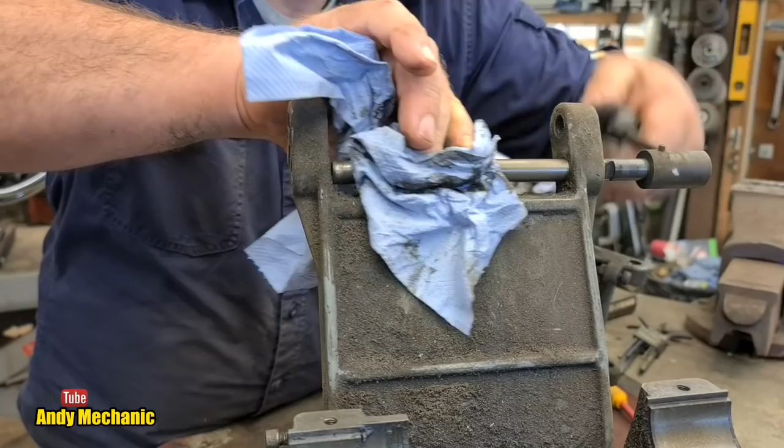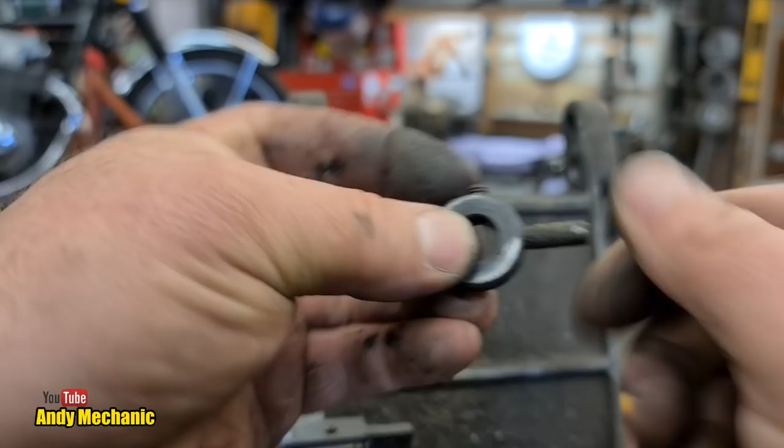Yay, it's out! Something else to clean. Right, let's just pop that grub screw back in there, because there's so many grub screws on this machine I don't want to mix them all up, and I'm not entirely sure if they're all the same. I know that one isn't - I've never seen a grub screw like that before.

Right, in the box. Okay, we've got a little bracket on the side to take off next. This should be an easy one. Oh yes, it's loose, excellent.

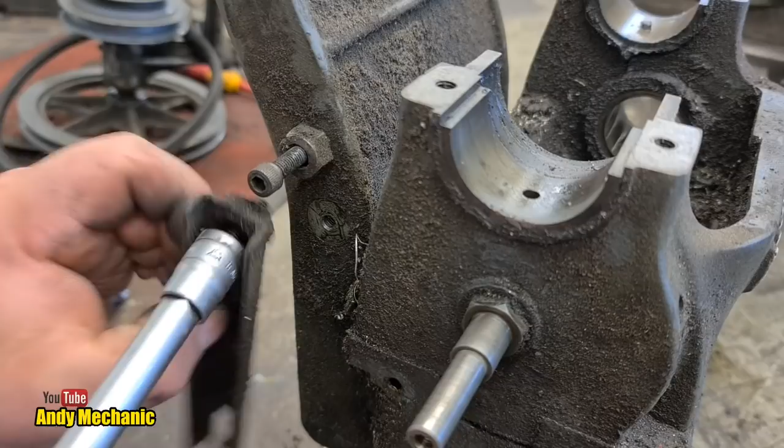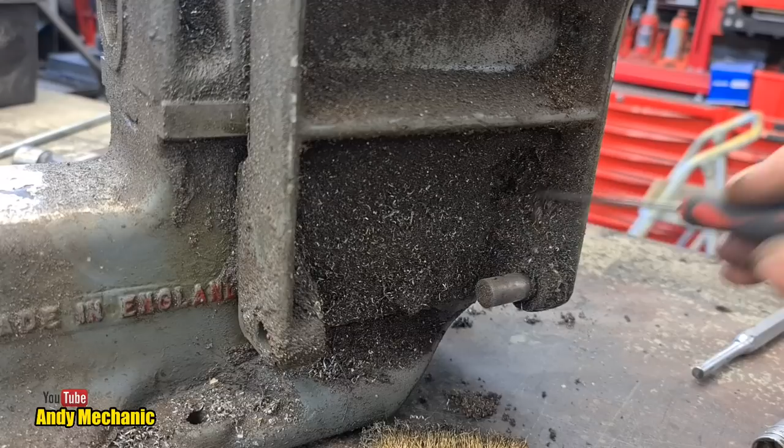There we go, we'll stick him in the box as he is. Right, now for the main bolts. Can you see any bolts? I can just see some under here, look. Holy moly. 1, 2, 3.

Wow, that's a lot of grime, isn't it? Oh, God. I don't think Dave ever cleaned this lathe. One thing I was taught at school, when you finish using the lathe, give it a clean. This is years and years of grime.

Okay, that was loose. That was loose. It's amazing this thing even held together. Everything was finger tight. What the hell's going on? 1, 2, 3. Wow! Look at that!

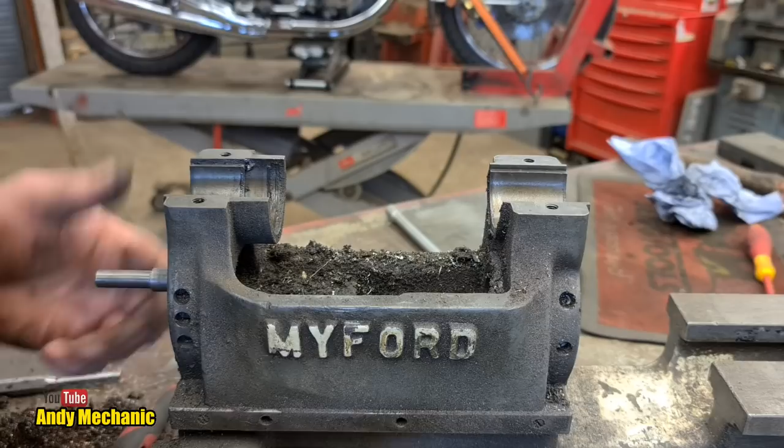Nearly done, we're so close. I want to take this piece off, basically the headstock assembly, just for cleaning, so I can inspect it a bit better and basically work out if there's anything at all that needs to be fixed or replaced. There's not really much left, it's just a casting, but you know, who knows, I might spot something.

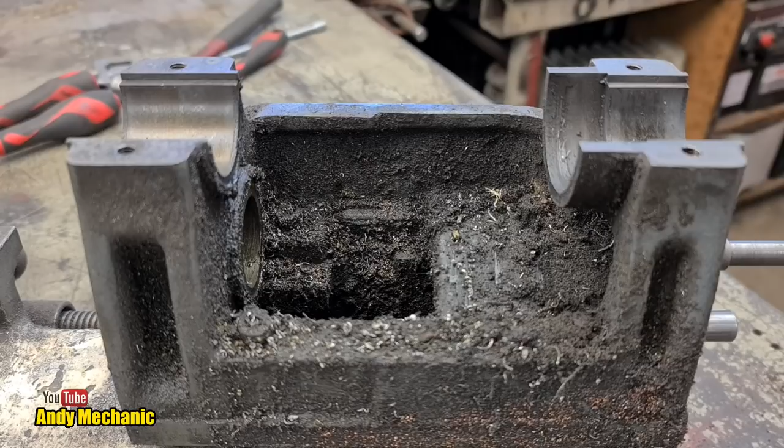So we've got 4 cap heads that hold it in place by the looks of it. So I need to dig down to those and get them cracked off. You got a much better view from the other side, to be fair, so we'll just dig in there.

Look at this. Dave! It's alright, if I complain, he'll say, well, just come down and clean my other lathe for me, Andy. It's like, I haven't got time to clean your lathe, Dave. You should be cleaning it.

Right, need an Allen key. Hopefully they won't be too tight. If the rest of the lathe's anything to go by, they'll be finger tight. But no, my luck, they'll be as tight as can be.

Nope, too small. Must be this one then. What's this? 1/4 inch. Is it a quarter? Hey, it's not. It's not a quarter. What the hell's going on? And it's not that. So it's not a 3/16 and it's not a quarter. What the hell? We're running out of sizes.

Maybe they've been replaced. Let's try a 5mm, maybe that'll fit. Nope, it's not a 5mm. Is it a 6? Looks too small to be a 6. Nope, it's not a 6. What the hell size is it?

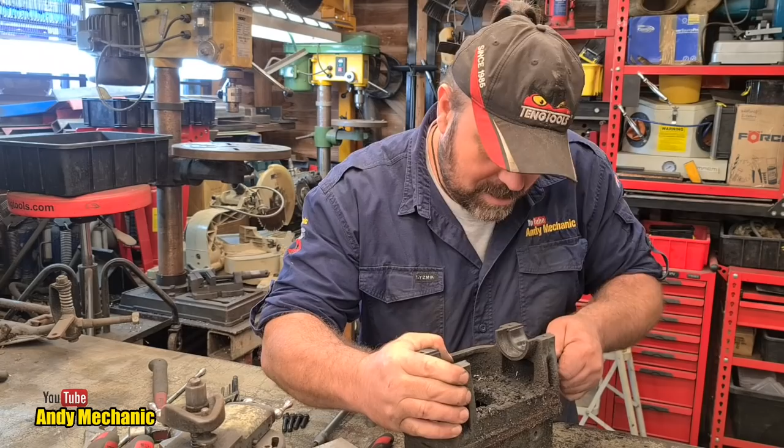Okay, is it going to come off, or is it going to be a fight? Come on, little Myford, don't let me down. What am I missing? Am I missing anything? I don't know. Let's give it a little lever. Oh, there we go, look. Special levering points to help it out.

Obviously a very precise fit and location. Nearly. Oh, there we go, look. Fantastic. Good job, Myford. I can get all this lovely and clean on both mating surfaces and make sure it's absolutely bang on when it goes back together.

What's next? There's not much left. Right, tailstock off. Should be easy enough. There we go. These.

Okay, let's give the lathe bed a bit of a clean, and then I want to see if the bed feels flat. They tend to wear a lot more near the chuck end, because that's where you spend most of your time machining. So once it's clean, as I move it down the bed, if it feels okay around the chuck area and then starts to tighten up further down the bed, then we know there's some wear at the chuck end and it's been adjusted up to work in that area. And of course the bed is actually worn down there. Poor little lathe. Jeez.

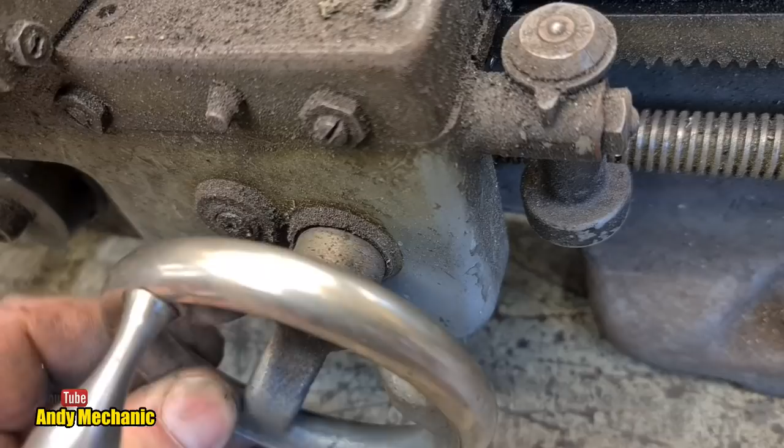Bugger. Okay, I'll show you the wear on the carrier. The carrier strip down is going to be a completely separate video, as is the headstock. Sorry, tailstock. Terminology. The thing at the end that holds the drill bits. Right. Okay, move the camera, Andy. Yes, I think it needs a new bush, don't you? Bugger.

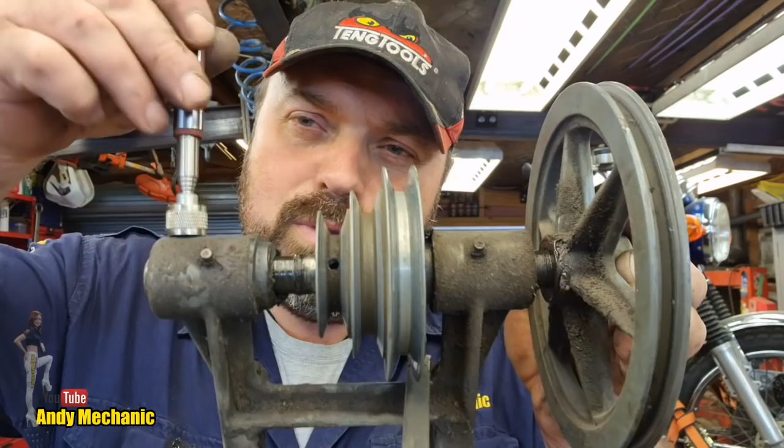Well, there's still one more bit to do other than the actual carrier itself and the tailstock, is this bit. Now, I've held back from stripping this down because if you look at the casting itself, it's made of what feels like, I don't know, is it steel or aluminium? Let's find out. Yes, as I thought, it's made of aluminium, which means it's even less strong than steel or cast iron. There's two bushes, one here and one here where the grease nipples are.

And if I try and press that through, there's a possibility that if it's jammed on this one, it might cause the actual frame, the casting, to fracture. And I imagine one of these is pretty expensive. So I'm going to have to take my time stripping this down. It'll probably be a separate video, but a bit more research, and I'll have a quick chat with James at Myford. I also need to catch him first thing tomorrow morning because I need to order that extra gear for that counter, what was it? Epicyclic lower shaft thing in the headstock. So we need one of those.

But at the moment, I won't say it's a problem, but I need to take my time stripping this down as I don't want to cause any harm to that casting itself. And who knows, we might require some new bushes, but it doesn't feel too bad. Maybe just a good clean up. And I really don't want to take this pulley off the end because I've been told that is an issue and you can damage them really easily. And it actually looks to be in good nick. There was what I thought was a break, but it's not. It's just chipped paint. That's all that is, so don't worry about that.

So we managed to get a lot more done in this particular video than I thought was going to happen. We've basically stripped the whole lathe down apart from a couple of major components, which will get done in future videos.

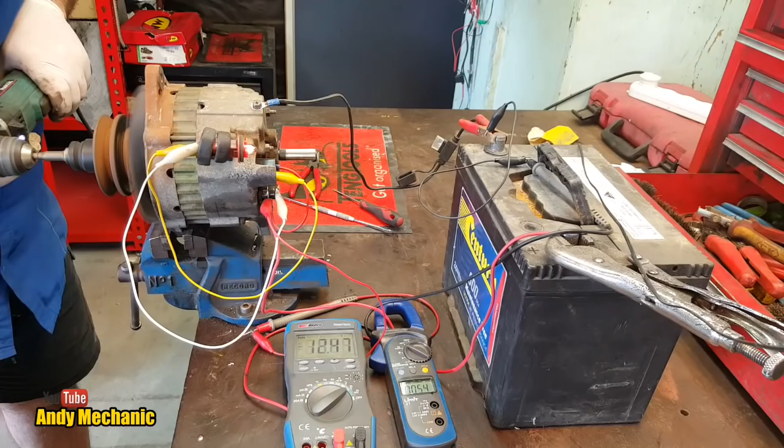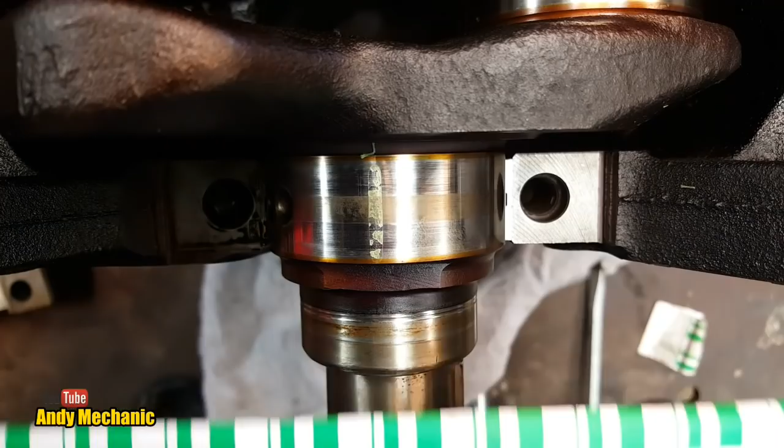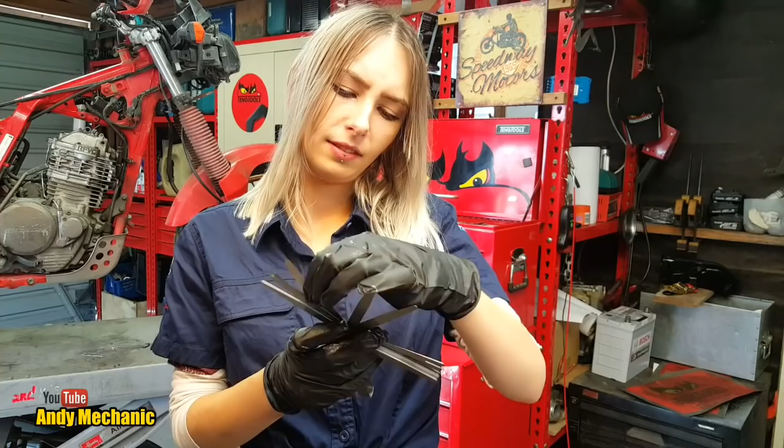Get the flip. Up again. Oh, really.